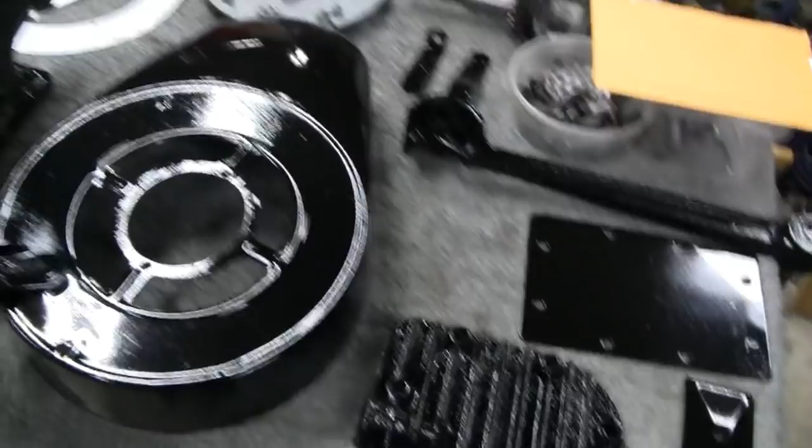Alright, I'm working on the little Briggs here, the Model Y, and it's been a little bit since I've seen you guys, so let me catch us up here. I got everything painted - the block, the shroud, the head, all that stuff, and the backing plates. And I even picked up a decal, that's the sticker that goes on this thing.

So I think where I'm going to start is we're going to start with putting the backing plate on and putting the magneto back on, spark plug wire and timing it up and getting that ready to go on. And then from there, I guess we'll put the piston in, the rings and the crank and stuff. But for now, let's get this backing plate back together.

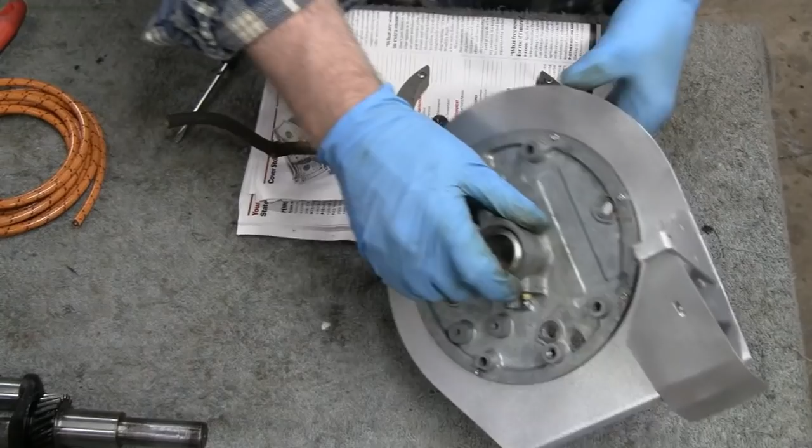All right, I attached the back plate here to the other back plate, shroud - I don't know what you call that - and the governor. Put the governor back up. So now what I want to do is take this plug wire off because it's pretty messed up, and I got some new stuff over here to put on it.

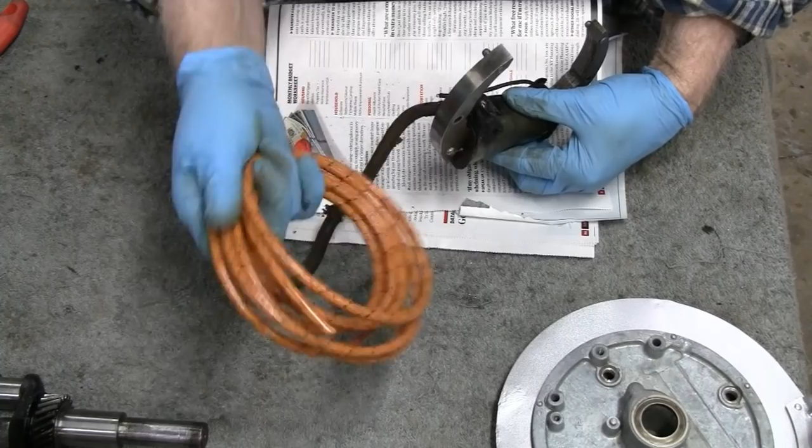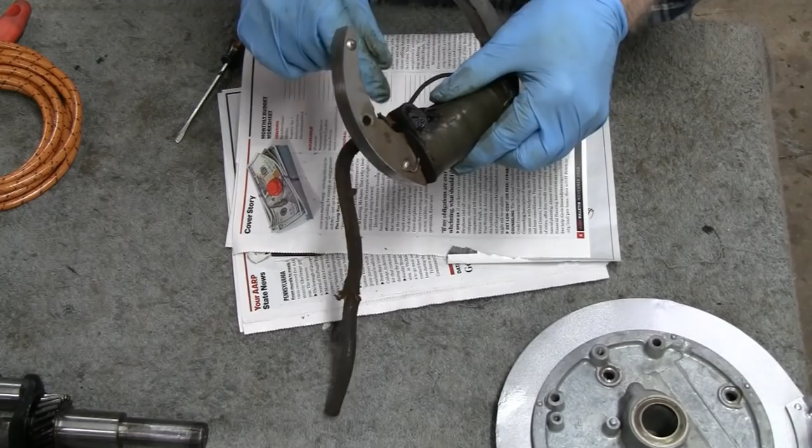And I come across something I've never seen before. These wires are attached to the coil and they're not soldered, they're just crimped on there. This is something I've never seen before - this piece of tape. They took the bottom insulating tape, wrapped it around, and then filled it with some kind of tar. It's pretty interesting because I've never seen that before on any Briggs engine, and it's a pretty good idea. So I'm going to dig this out and get to the little clip we have to hook the wire to, and then we'll turn these back on.

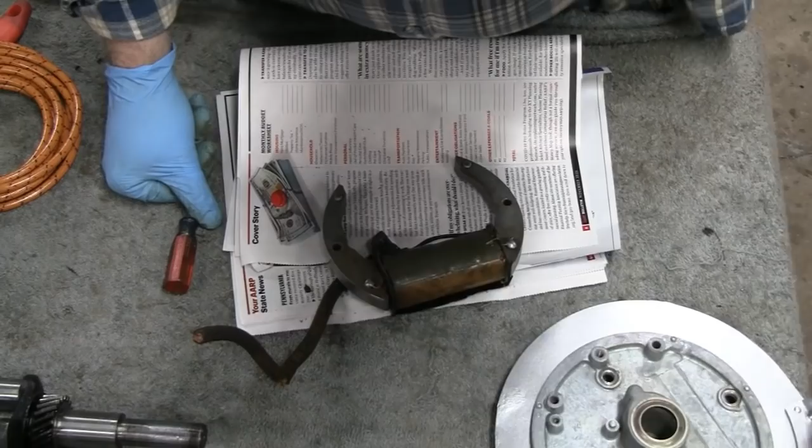Alright, I brought you guys down here with me because I've seen a couple things that are pretty interesting. I was able to get the tar off in just a couple big chunks, so that was a good thing. And what I came across that was interesting - kind of dark here, let me see, maybe that'll brighten things up. But somebody actually soldered this to that terminal there. Like I said, I've never seen tar around these, and I know Briggs didn't solder these on there. Let me see if I can clip that off.

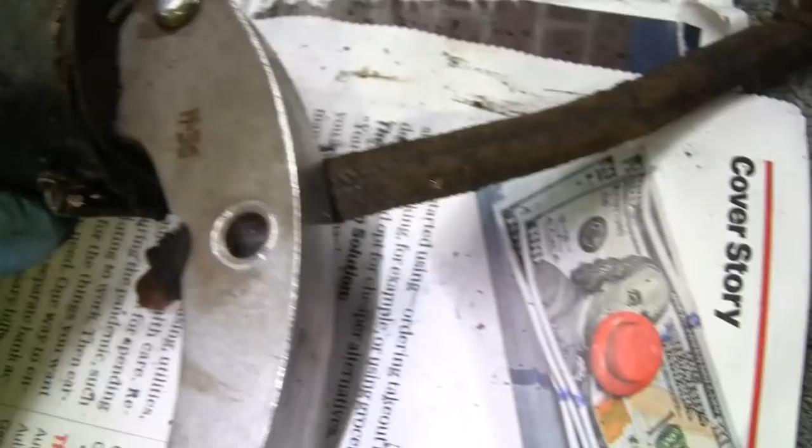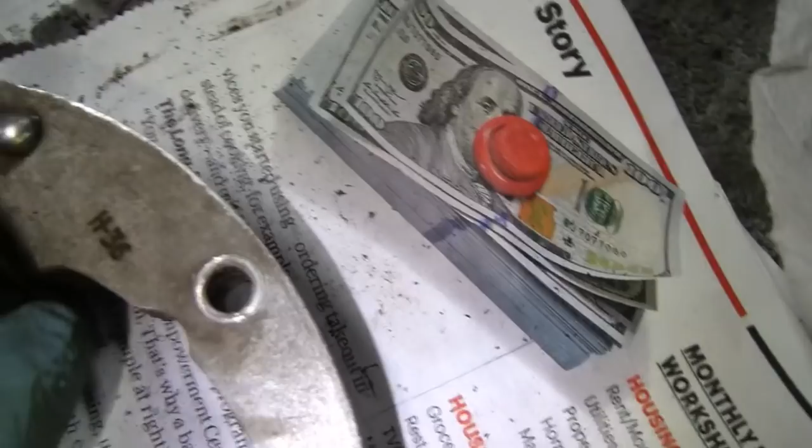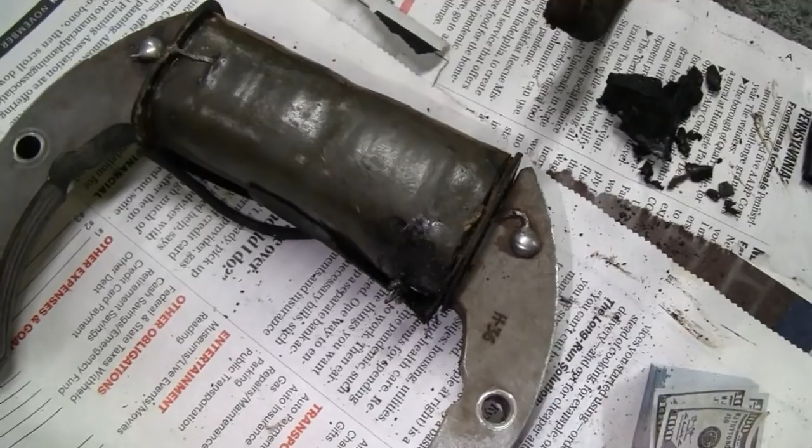So what I'm going to do is take a little grinder on the Dremel, little cutoff wheel, and clean that off. Can you see the solder there? That's not good. But another thing I noticed was they got the date on here - I've never seen the date on a coil before. There's the H36 again, if you remember that H is I think August and 36 is the year. Not only is it on one side, but it's over here on the other shoe, on the other side. Interesting - yeah, I like to bring you little things like that. If you don't want to hear this interesting stuff, let me know and we'll just continue on. All right, let me grind that and clean that up and get that ready to go.

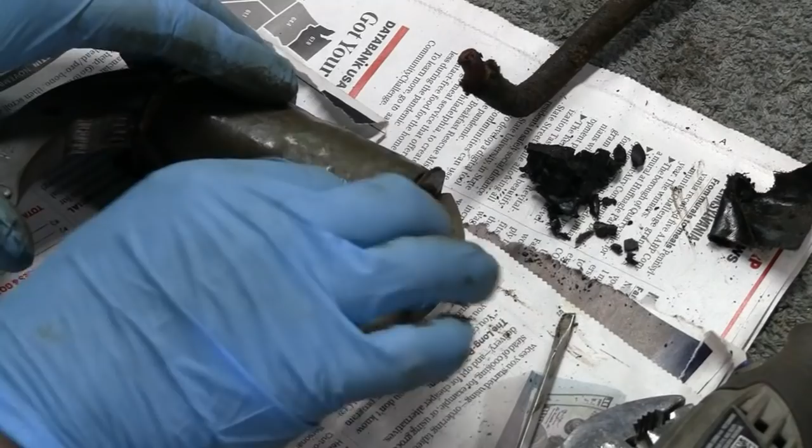Okay, got the wire off. Now I'm just going to clean up that little blob of solder on the top there.

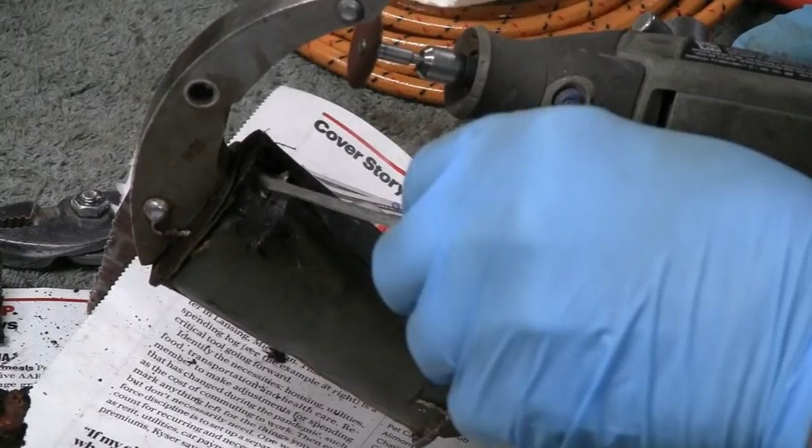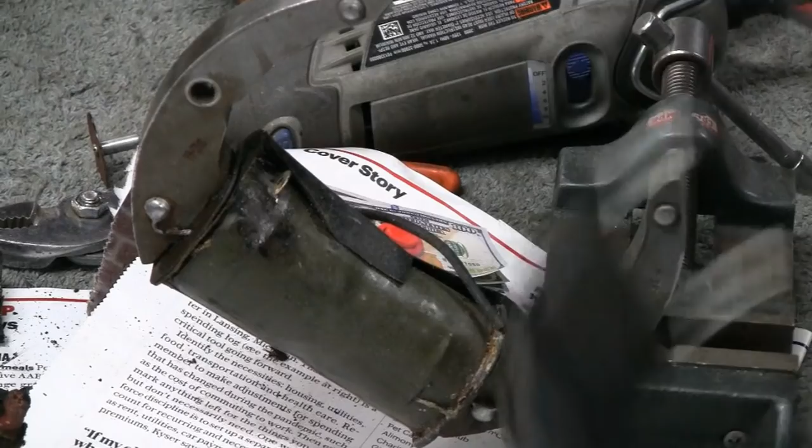Looks pretty good. Yeah, if any of you Briggs guys know anything about this, let me know. Like I said, I've never seen one soldered on before, and I've never seen one encased in that tar. Yet this seems to be the right coil for this engine because it has the date on it, and the engine seems like it's in pretty good shape, like it wouldn't have been messed with before.

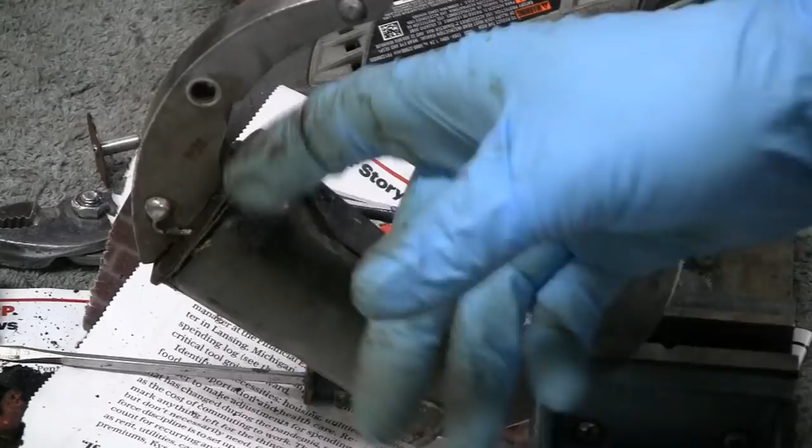So anybody knows anything about that, let me know, I'm curious. All right, let's put the - I don't know, maybe I'll put the plug wire on after we hook everything else up. Alright, let's continue on. I'm ready to put this together. Put my glasses on so we can see what's going on here. And let's see what we got here.

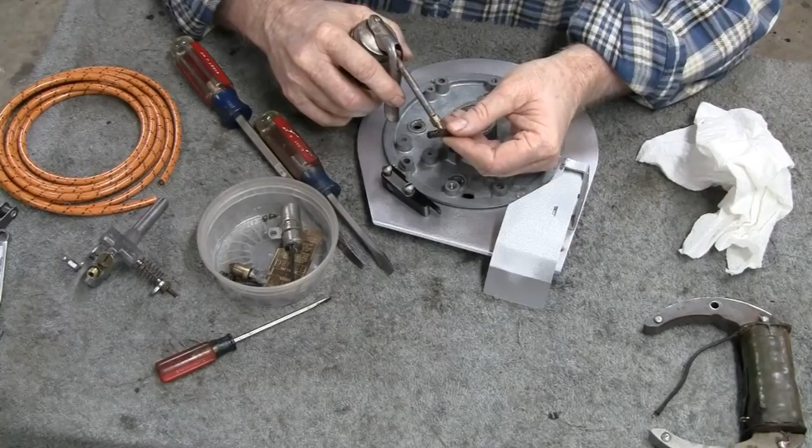We don't need the carburetor. Now we can need these. And we need this. Alright, let's put the points on first. The, I call it a plunger, I don't know what else to call it, but we'll just give it a little bit of oil. Don't need much - don't like to have a lot of oil around the points here.

All right, guess we can put these on first.

Cleaned all this stuff up, so it's pretty clean. Alright, the points line up pretty square. If those points didn't line up square, you have a screw or a bolt back here that you can move in and out. This part of the points is stationary, and this is where you make your adjustments down here on these two nuts. But this should be okay, because if I remember, I checked them before I took it apart and they were okay.

Alright, let's put our condenser back in here. I also checked that - even though it was brand new, check it before we go any further. Okay, you know what, I'll loosen that up in case I have to move that. I'll leave that loose. All right.

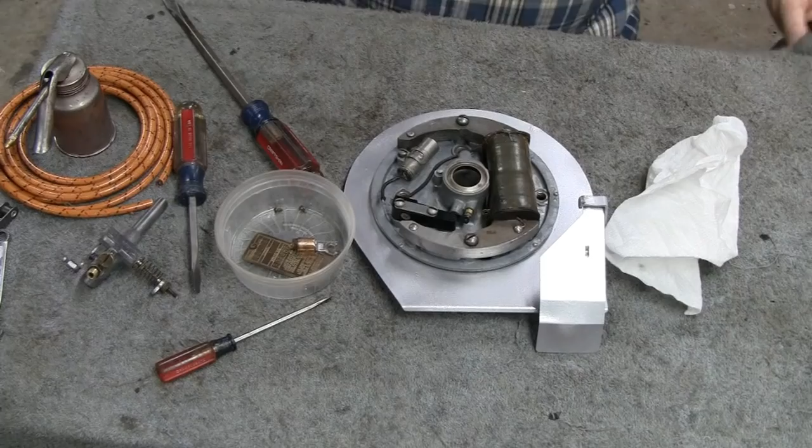Alright, and then this here goes onto the spark plug wire. So, alright, let me solder these two on there, and then maybe we'll make a wire for it.

Alright, take a break. Alright, got that all soldered up there - soldered, for my British and Aussie subscribers there - and tightened up the capacitor, condenser, for you guys who still call them condensers.

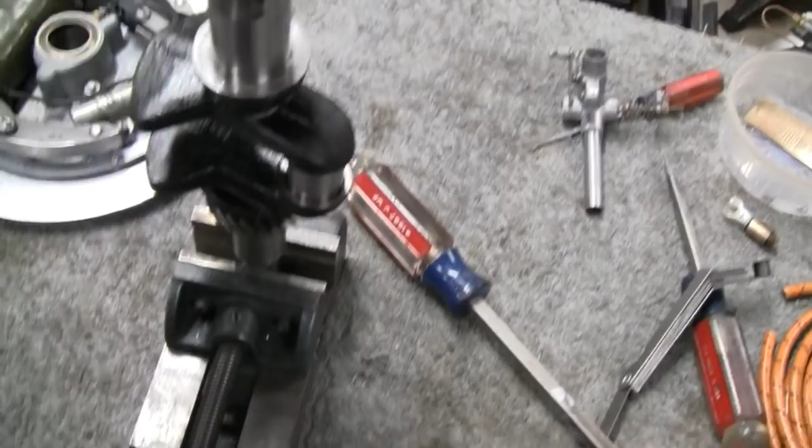And I set my crankshaft up here in my little vise, and we'll adjust the points. You can adjust them when it's not on the engine, that way we just throw it in there.

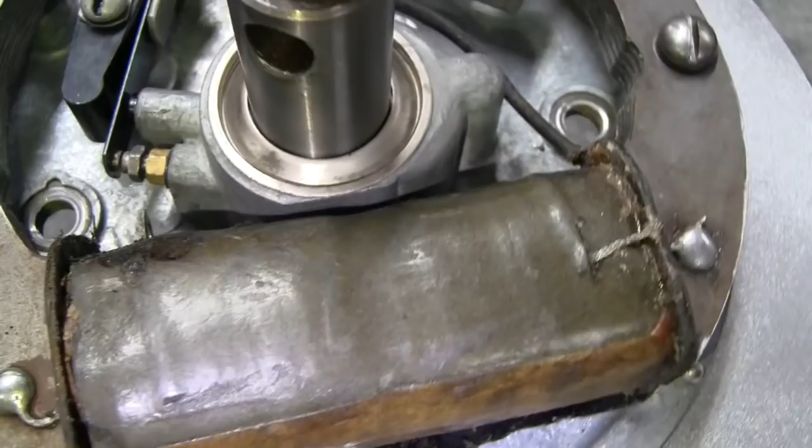Alright, give you a little light there. You see our points there, they're open, and then you go around here, and they close. So you bring it to where they're open.

And then we get our 0.020, 20 thousandths I guess that would be, and we'll stick it in there, and thankfully it just goes right in.

Alright, yeah, I think I checked this before I took it apart and everything was adjusted, so if it wasn't, then you would just loosen that nut up and adjust that to where it had to be. Yeah, these are a little pain in the neck to adjust, but they're actually better than the other ones, you know, more accurate. So, alright, that's all ready.

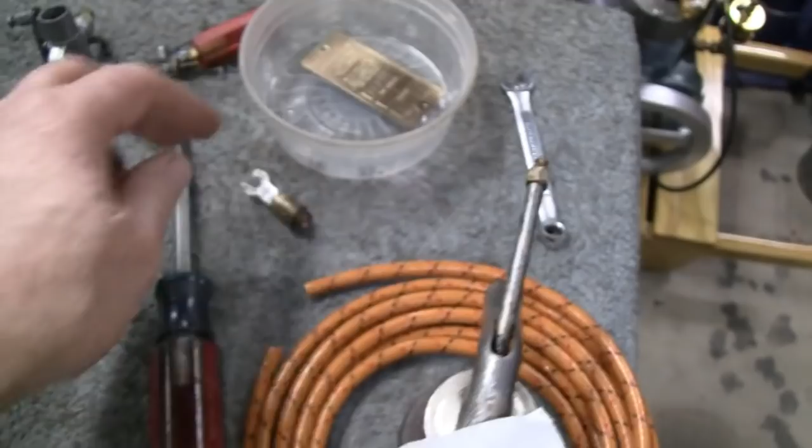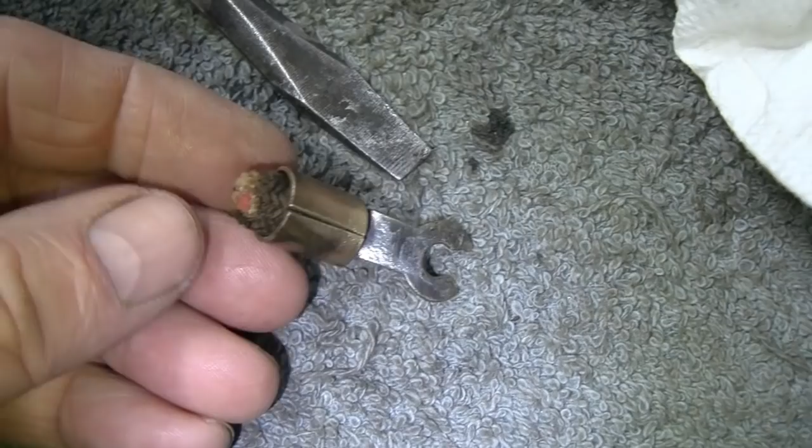What I'm going to do now is - this is the end of the spark plug wire, let me put it down here so it stays in focus - I'm going to cut the old one out there, then put it on the new piece of wire here, and we'll stick it on there, and that'll be all ready to go.

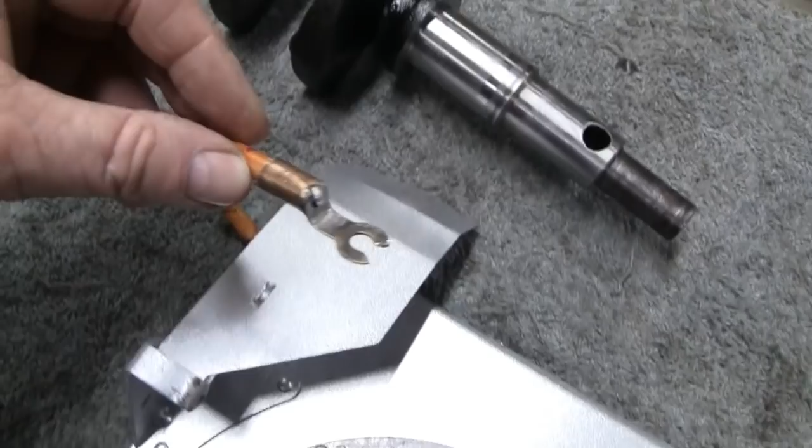Alright, got our coil plate all done, and backing plate and everything all hooked up. Got our spark plug wire here with the original tip I soldered on there, and we're all clamped on in the back there, so we're ready to go with this.

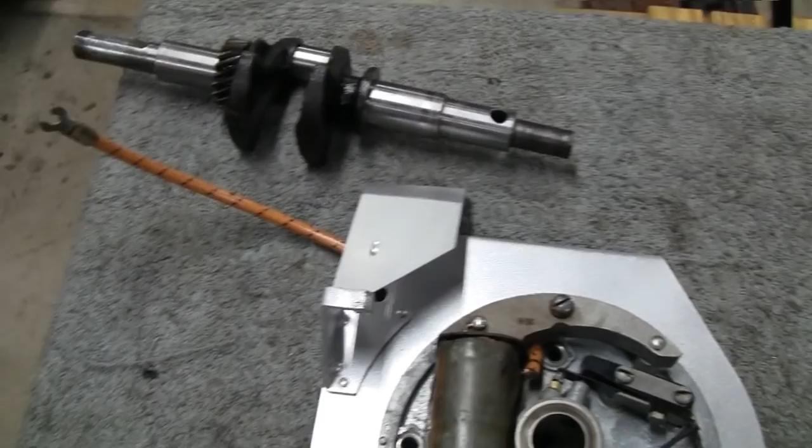So I guess we'll put the piston in, put the crank and the piston in, and we'll see how that goes. Alright, ready to put the crank in now, and let me show you where the timing marks are.

They're very important - without that, you're not going to get the engine running right. Let me see if I can get you a little more light over here. There we go. I'll try and stay out of your way too.

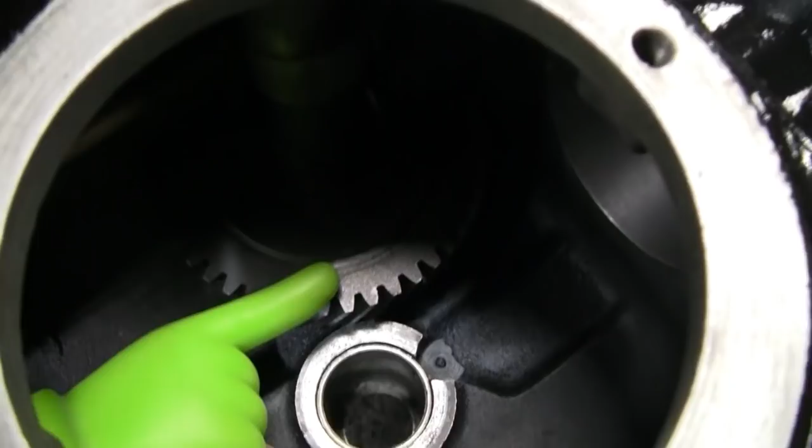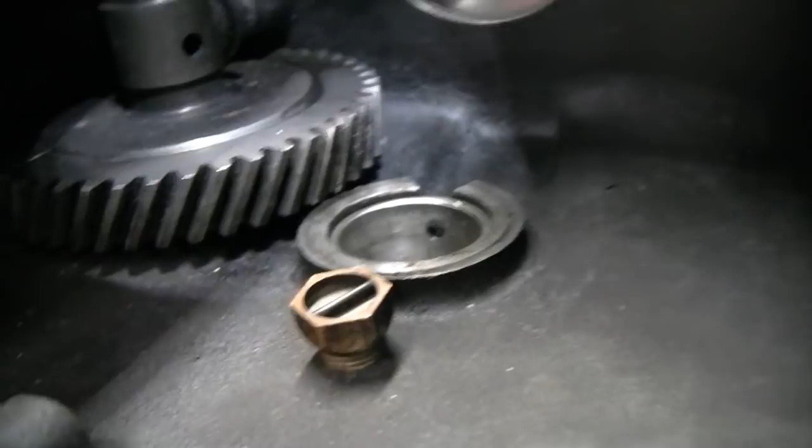See, there's one timing mark right there, and we have to line that up with this one on the crank. I don't know if you can see that. It sounds easy to just put it in, but if you look at the gears, they're on an angle - I think they might call them helical gears, I'm not sure, somebody correct me if I'm wrong. Same with those gears there, they're on an angle too.

So you sort of have to put it in a little crooked and hope they line up, and if they don't, you just got to move it again. So what I'm going to do is put a little white paint on there to make it easier for us to see. Not that it's that difficult, but it's not going to hurt. I'll see you after we do that.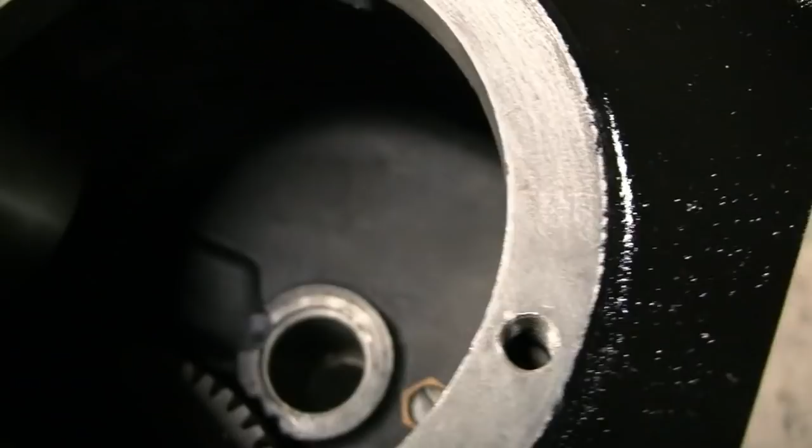I put a little white dot on there. I don't know if you can see that - sometimes with this light it washes stuff out and makes it worse. There you go, okay. Let's put a little white dot on here.

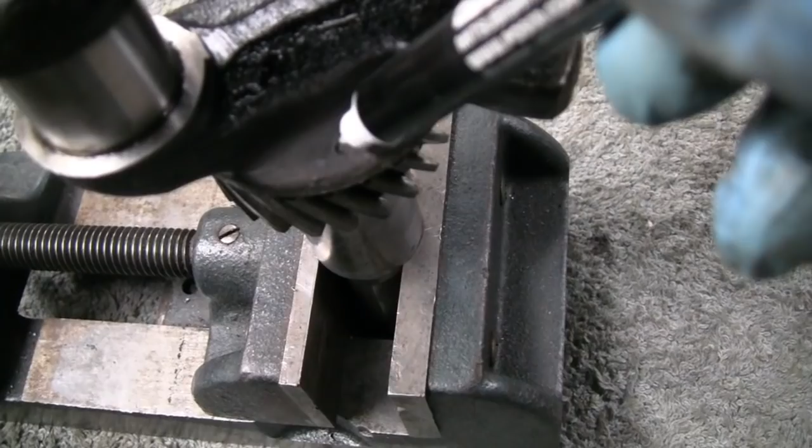Yeah, I had to load my pen up here again. I use these all the time, these Posca pens - I always leave a link in the description if you guys are interested in this kind of stuff. So that makes that one a lot easier to see.

Alright, let's try and put this thing in now. Yeah, I want to lube everything up. Let me turn the light on this camera. I want to put some lube in there and lube the tappets and everything else. Got to put lube down here, some oil, and then oil up the crank. So let me do all that, and then we'll try and line this up.

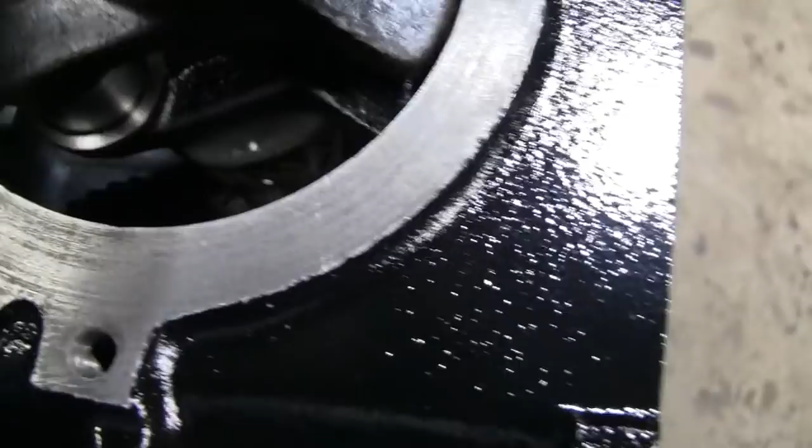Alright, we're all lubed up here and ready to go. Stick it in there. I'm going to stick it in wrong, that way you can see that they don't line up. So they don't line up - you see, and then when you twist them, you just lift it out and go to the next tooth.

And that one - they meet up there, you see? They're right where they belong. So like I say, they're helical gears, and they just don't go right in. So if you don't get it first, you lift it up and try it again. But you got to make sure they line up just like that - they point at each other. So, alright.

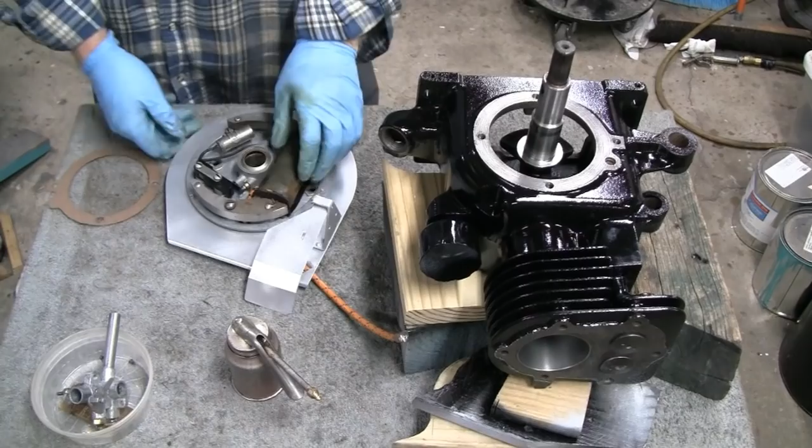Now let me get the side plate there, we'll put that on. Alright, let's put our homemade gasket on here - remember that? Turn this over here, try and line this up as much as we can.

I must say that's pretty good. Alright, let's lube it up here. Plenty of lube.

Remember how tough this was to get off? Look at that, look at that - went on like it had eyes. The gasket's moving down there. There we go, there we go.

Alright, let me find the bolts. I'll be right back - alright, I got them right here. I moved you guys over a little bit, maybe you can see a little better. Go right in here between the wires and this one here.

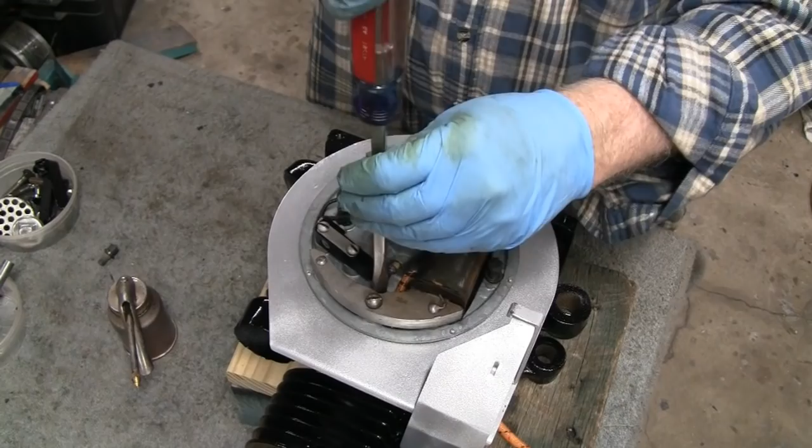Oops. They don't leave you much room there - actually got a little cutout there. I don't know, you probably can't see it on either side, but there's a little cutout there so you can get that screw in there. I'll just screw it down while I got them in there, right?

Alright, bear with me - last one here.

Alright, we torque it down there - I think these were 2 grunts. Whoa, whoa, almost lost our engine there. Ugh, my hands are kind of slippery from all that grease and oil. You tighten these down and then I'll check them before I put the mag on.

Alright, that's pretty good. Okay, our crank spins good. That's all you need.

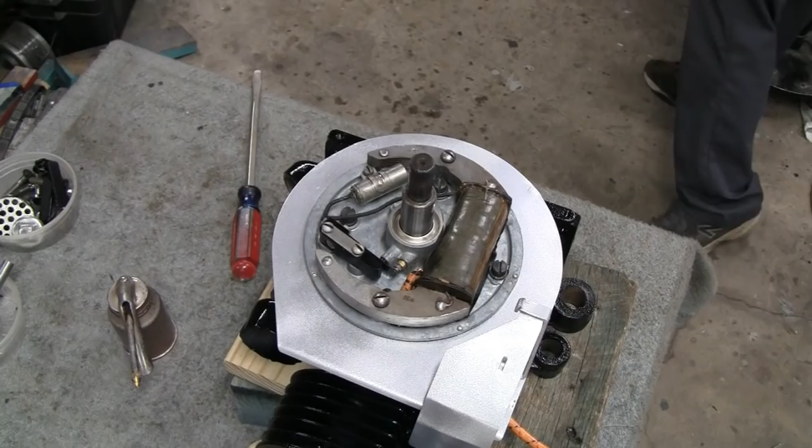Let me see how much time we got left on this, and figure out where we're going to go from here. Alright, we're ready to put the piston in.

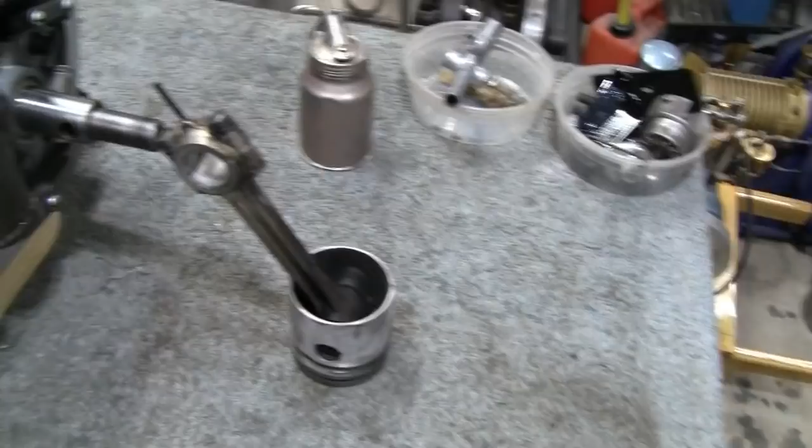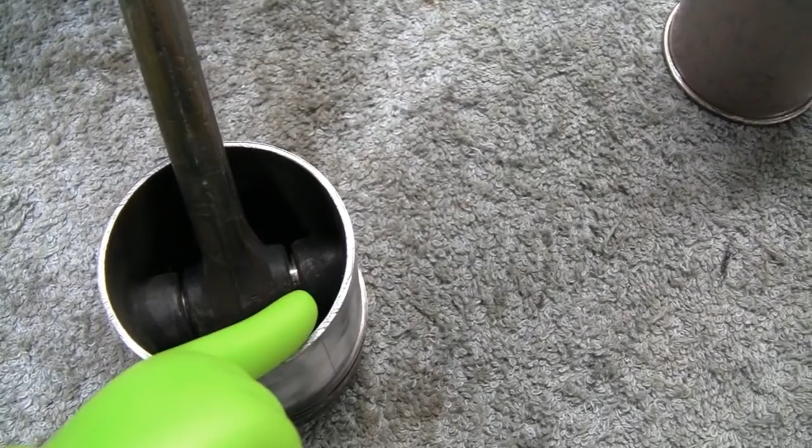I have it sitting up here, and there is a front and a back to that piston. I know in other videos people question me, but there's a little X. I'd like to draw your attention over here. There's a little X on that boss right there that holds the pin.

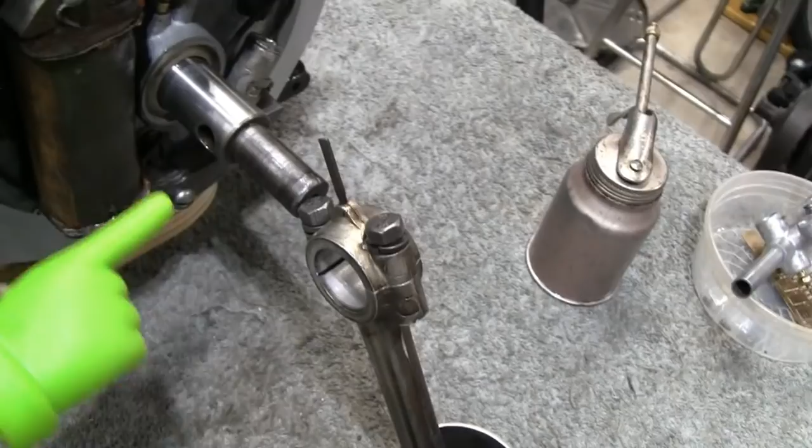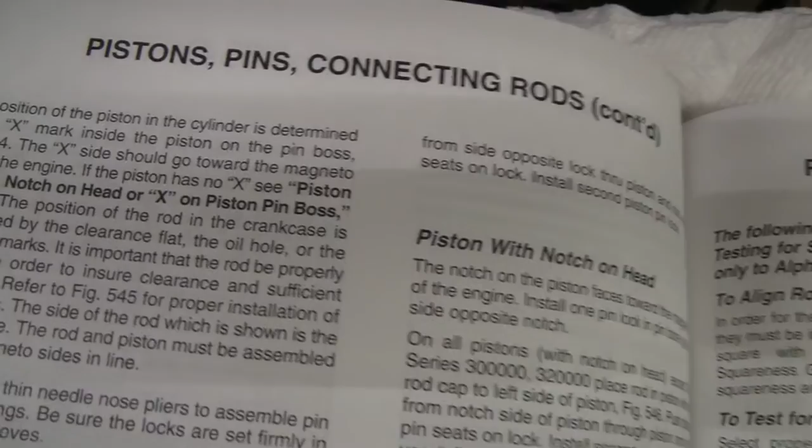I'll come over here out of your light. It's going to be tough to see because everything is black and dark in there, but right there's a good shot. There's the X. I've always said the X or the mark goes on the side of the flywheel, and a lot of guys questioned that and said I was wrong, but I actually have the Briggs manual over here.

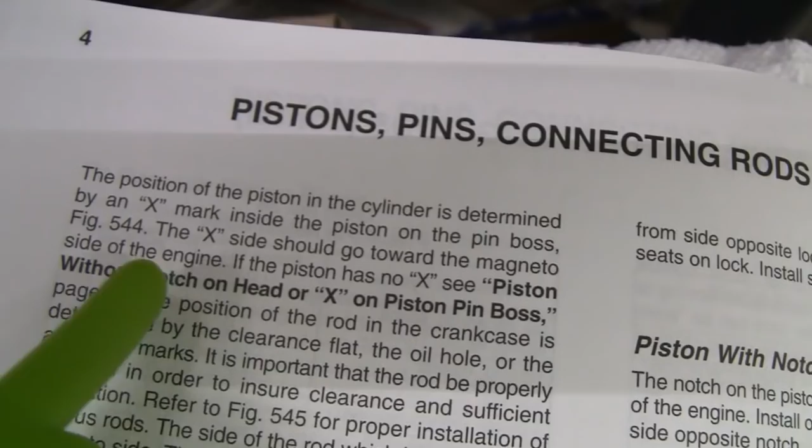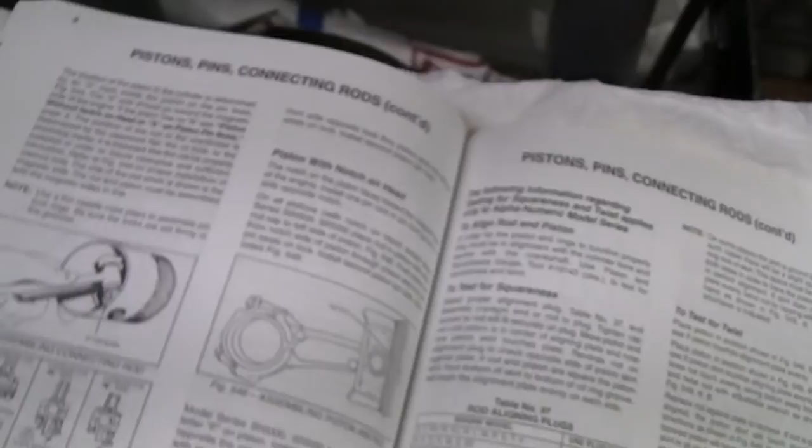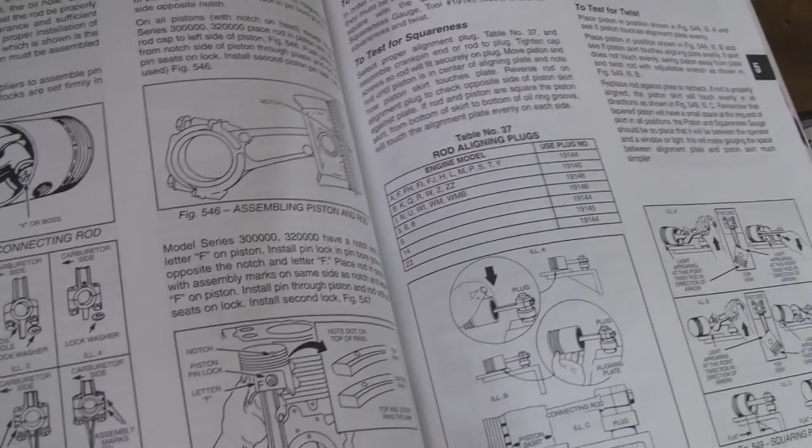Some Briggs engines don't have the X. Here's a picture of one - some of them have a notch. That notch goes towards the magneto, and some of them have a letter F. The F I guess stands for flywheel - flywheel and magneto both on the same side. So that's what we're gonna do, we're gonna go by the book.

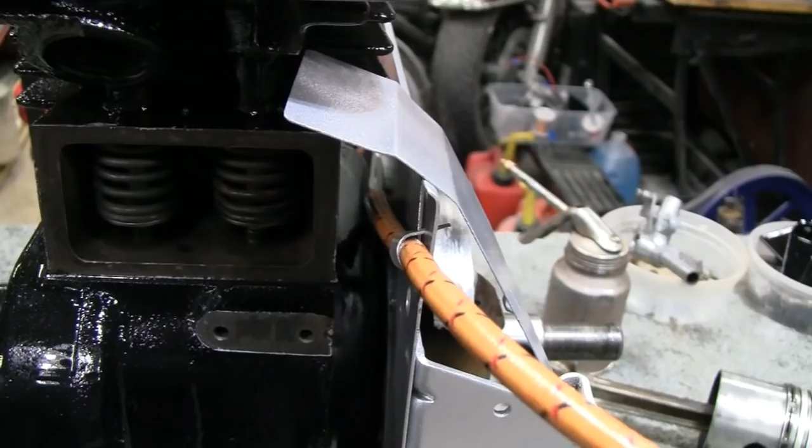A couple guys questioned whether I adjusted the valves and everything because I didn't show it, and I did - I checked them and they were good. Afterwards, when I was adjusting them, I didn't like the way they felt because it was looser on one side than it was on the other.

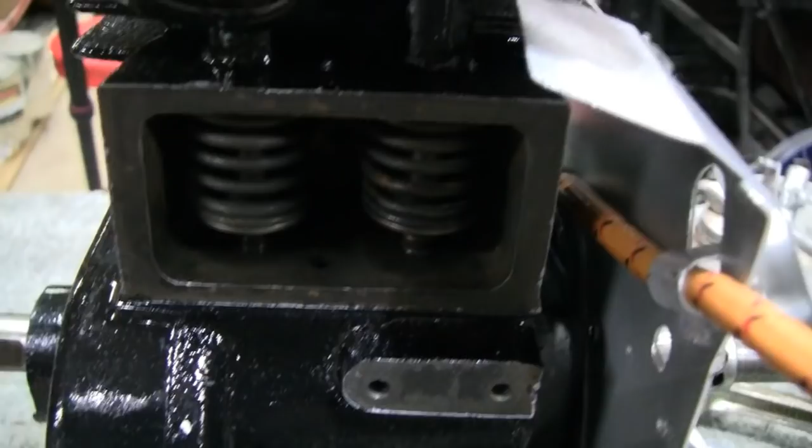So I took them back out, and the exhaust valve especially - whoever adjusted these before, or cut them down, it was on an angle, and it should be flat and square. I had enough material there that I was able to square everything up down there, and I figured while I was there I might as well do the other one. Even though that was within tolerance, it took so much off that it was still within tolerances. So we got plenty of clearance and everything's working right.

So I'm gonna oil these up, send some oil in through the intake and the exhaust, and send some through the top, and then oil the tappets and everything. Everything is going to be very well oiled here, and then we'll go stick the piston in. Alright, let's put this piston in now, I'm going to lube everything up.

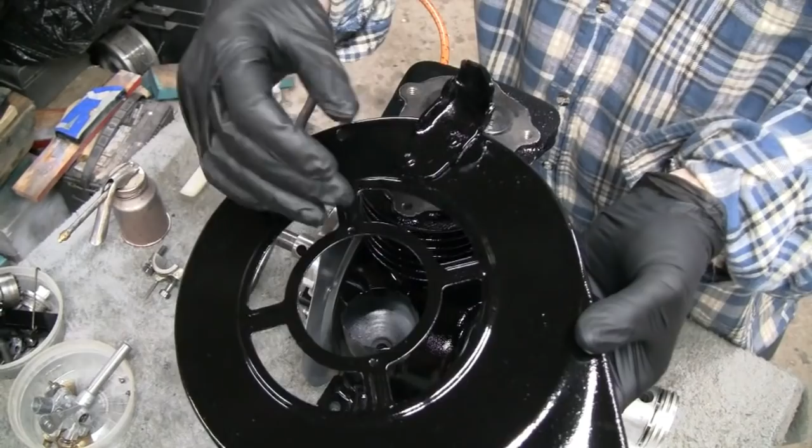Oh yeah, another thing, you see this breather here? I need a cap for this. If anybody out there has a cap for this crankcase breather, get in touch with me, I'd appreciate that. Also, you know what else I'm missing is this - there's a black cap, could be any color really, that goes over the kickstarter gear here, and it's missing that. Well, the engine will run without any of them, but that'll just complete it. So if you got a cap for that shroud or a cap for this breather, let me know.

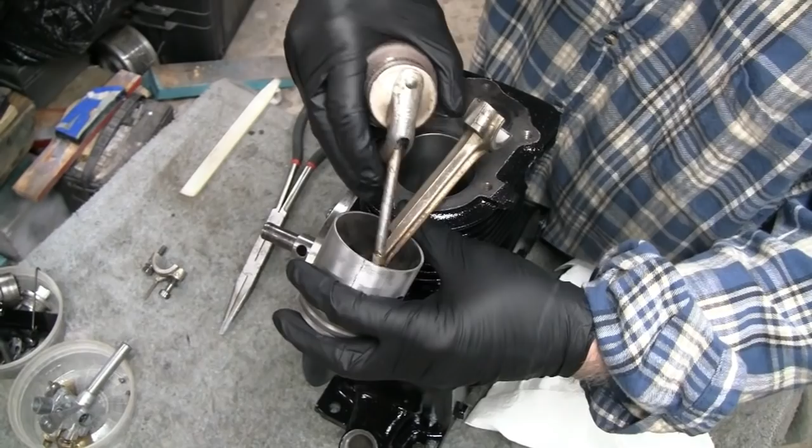All right, let's lube all this stuff up here. Here it needs oil, needs oil. Put some on here.

I noticed this doesn't have a bevel. You know what, while I'm thinking about it, let me clean it, let me wipe this off. There might be some dust that got on these cylinder walls just from sitting. Yeah, a little bit of dust.

Plenty of oil. Alright, before I interrupted myself there, I was saying I noticed that this engine doesn't have a bevel. I think the 5S and stuff have a little bevel, and it makes it pretty easy to put the rings in without a ring compressor. But we'll get it.

Plenty of oil. Make sure you get it in there behind the rings.

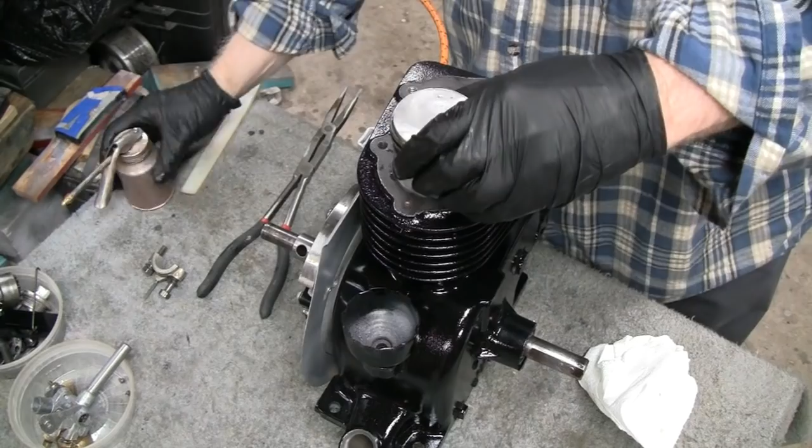Right, I can't see my X, got oil on it. Right, it's right here. So we'll put that towards the flywheel. Put a little more oil on this, never have enough oil. Alright, double check there, there's my X.

Alright, like I said, I don't have a ring compressor. I do, but it's not handy. So usually, sometimes if you put a little pressure on the top of these, and I got a thing here for putting the glass windows in, let's see.

I'm going to bring the opening right to the front so we know where it's at, because you don't want to line them up with each other. Alright, let's see if we can get this to go in a little bit. Because sometimes this works, sometimes it doesn't. The hands are kind of slippery, so.

Okay, there we go. Now I'm going to take this other ring and put the opening to the side here. It's a lot easier when everything's not slippery.

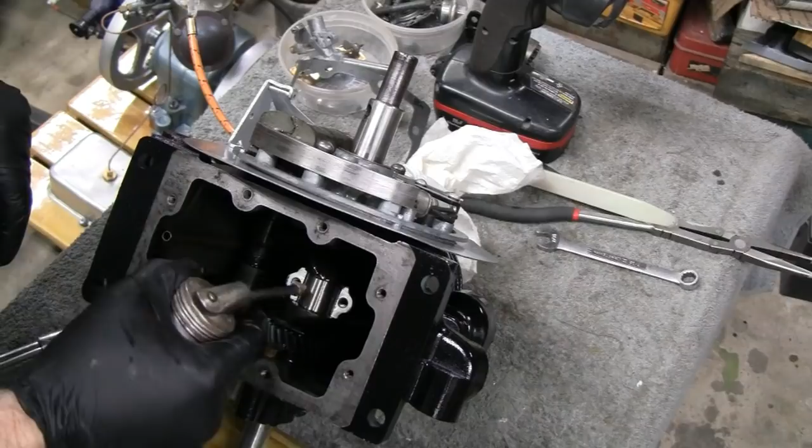Now I'm just going to oil up here and put the cap on. Even the cap has a little mark on here. I don't know how well you guys will be able to see that, but right here there's a tiny little mark, and the same mark is on that side. So put a little oil on this and stick it in. I was talking there, I wasn't paying attention which side the mark was on. I was lucky it was on the right side.

Put our lock washers on there. Alright, this video is getting kind of long, so I'm going to run them up and then we'll torque these down. Alright, we got these all run up there now, just have to crank these up.

Alright, I'm going to see if it... alright, there you go. You always want to check, make sure it's not locked up. And we're doing fine there. So, alright.